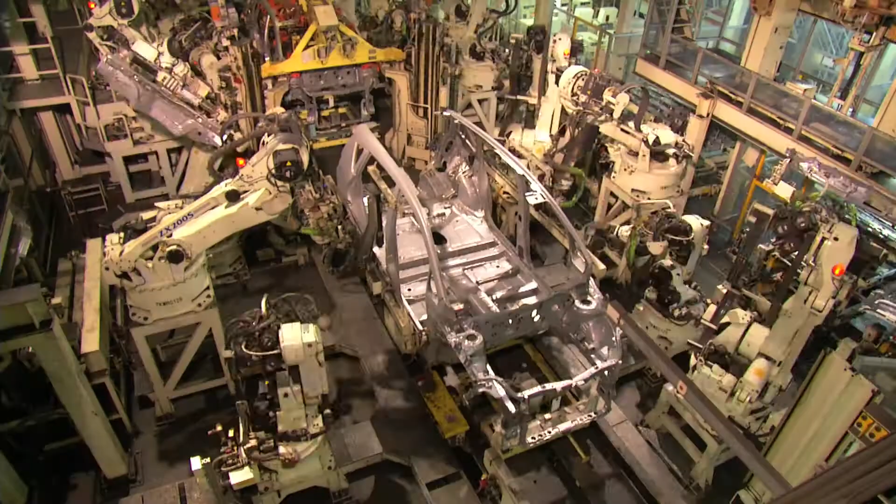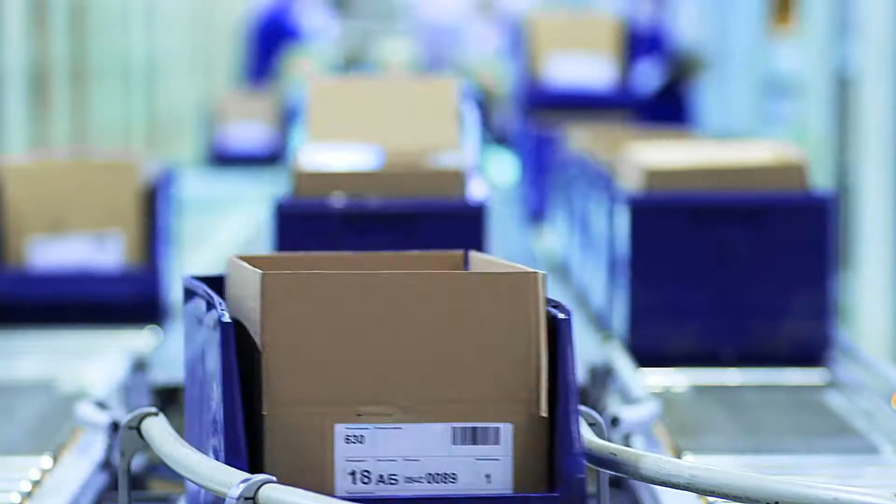The automation of mass production has been central to the growth of manufacturing industries. However, the ever-slowing rate of industrial growth is demanding a new paradigm shift.

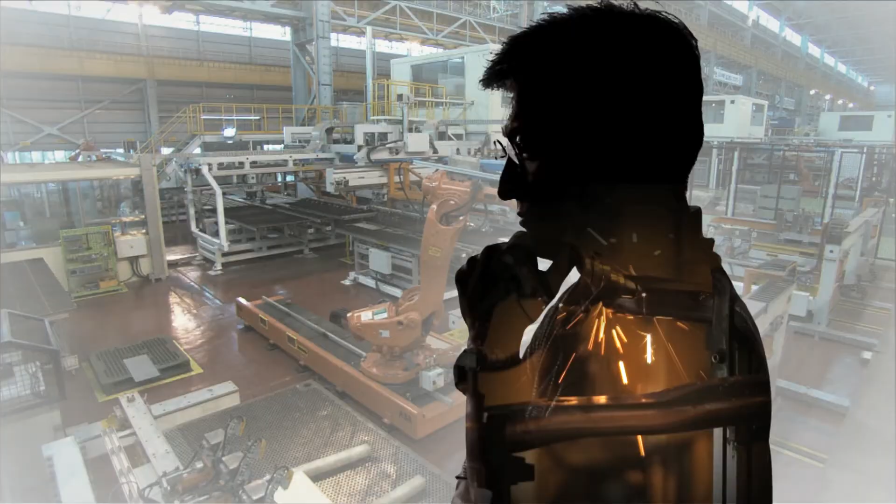Here is an industrial company boldly blazing a new trail, having successfully led the innovation of Korea's manufacturing industries. Understanding that manufacturing is at the heart of industrial convergence, POSCO is turning the vision of smart manufacturing into a reality through the convergence with cutting-edge ICT technologies. This is the story of POSCO ICT's Smart Factory journey.

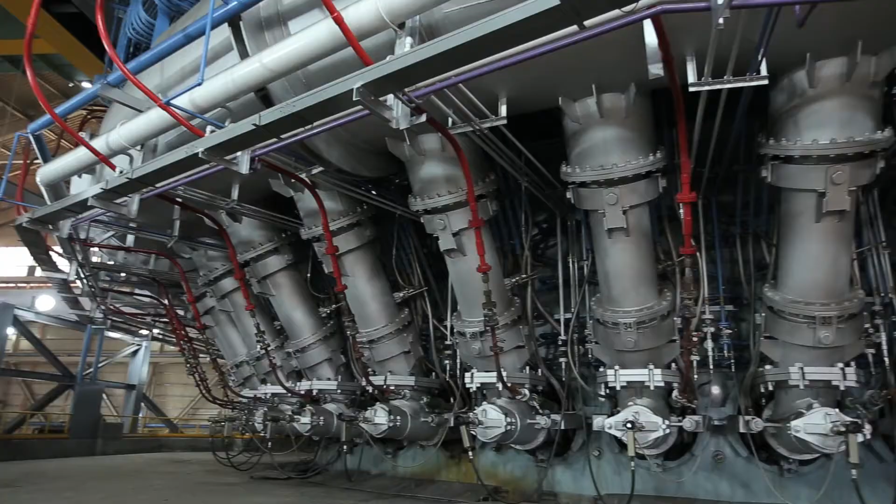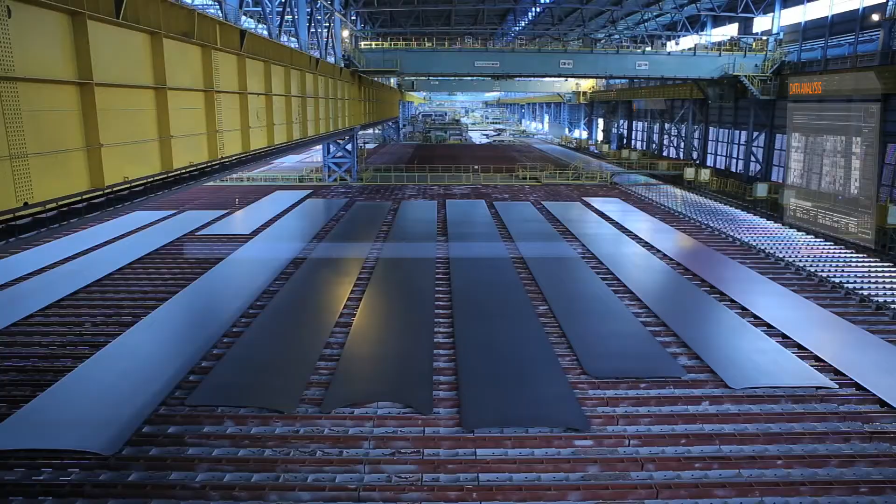With POSFrame, the world's first smart factory platform for steel and process industry, POSCO ICT adopts an IoT sensor to collect data of all fields so as to analyze and predict with big data and to control every process automatically with artificial intelligence technology.

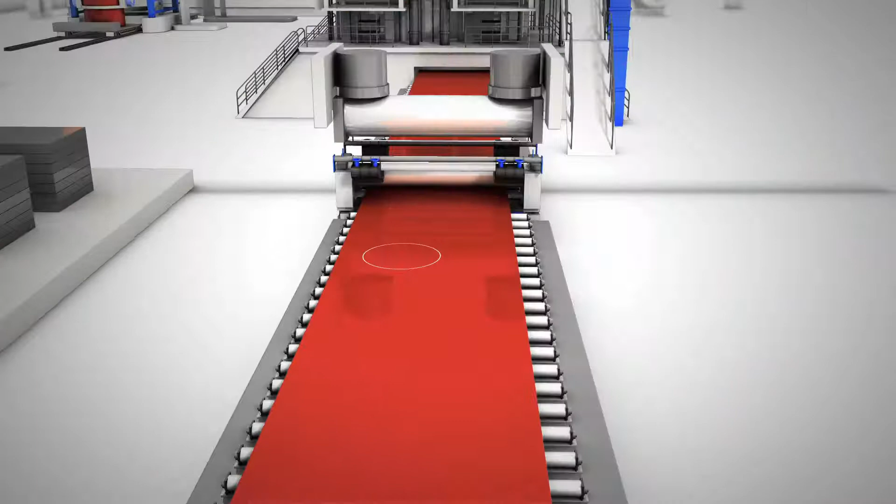Smart Factory enables POSCO ICT to achieve zero unplanned downtime operations through efficient asset management and minimize defects by intercepting quality issues online.

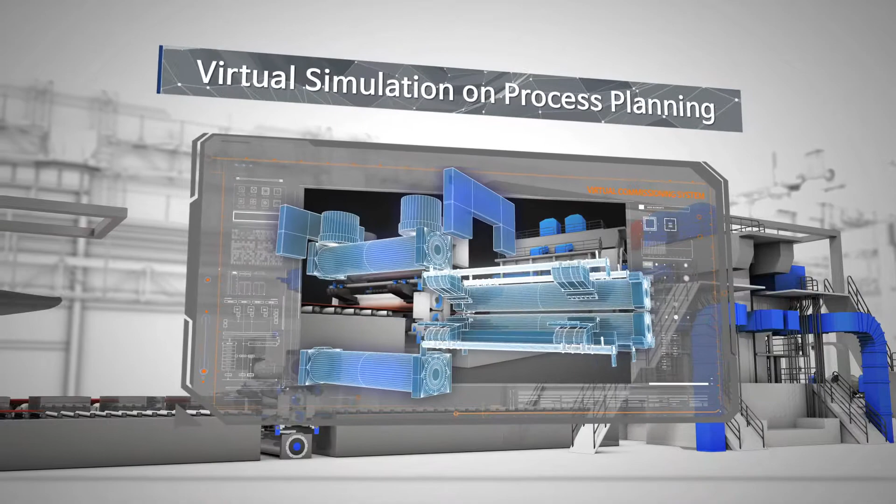With Virtual Factory, engineers can simulate production operations in advance. Smart Safety allows taking real-time countermeasures against industrial safety hazards on the factory floor.

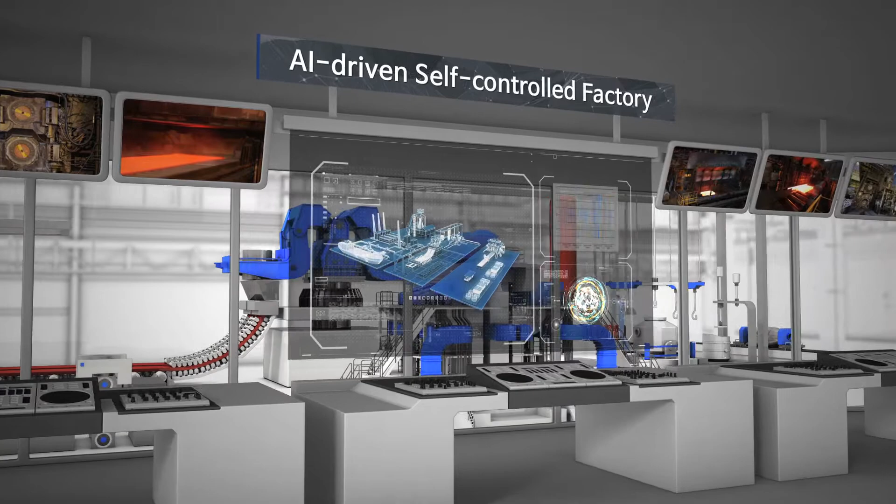Ultimately, POSCO ICT is in the process of forging a self-running steelworks that can learn, decide, and control processes through artificial intelligence technologies. Steelworks with human intelligence while overcoming human limitations. That's what POSCO ICT's Smart Factory is all about.

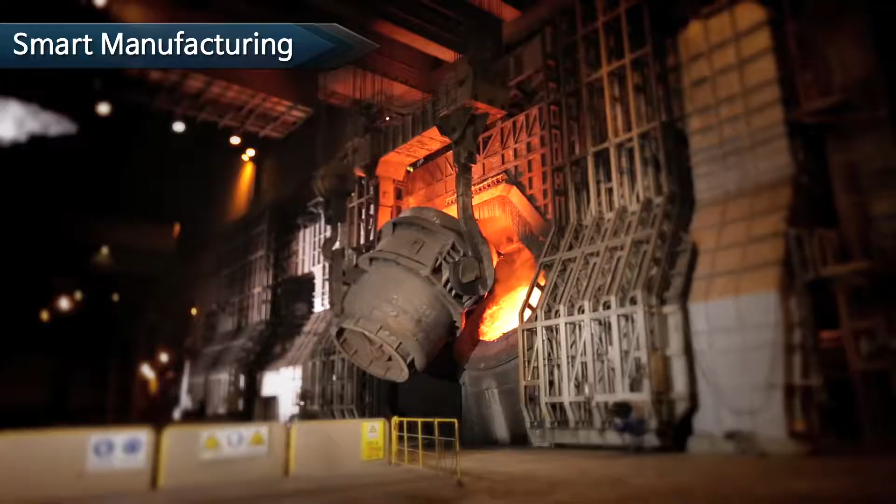Massive production assets, equipment, and facilities comprise steelworks. Productivity and quality depend on how well they are managed. Rolling machine reduces semi-finished slabs to thinner and longer strips by passing them between two rolls.

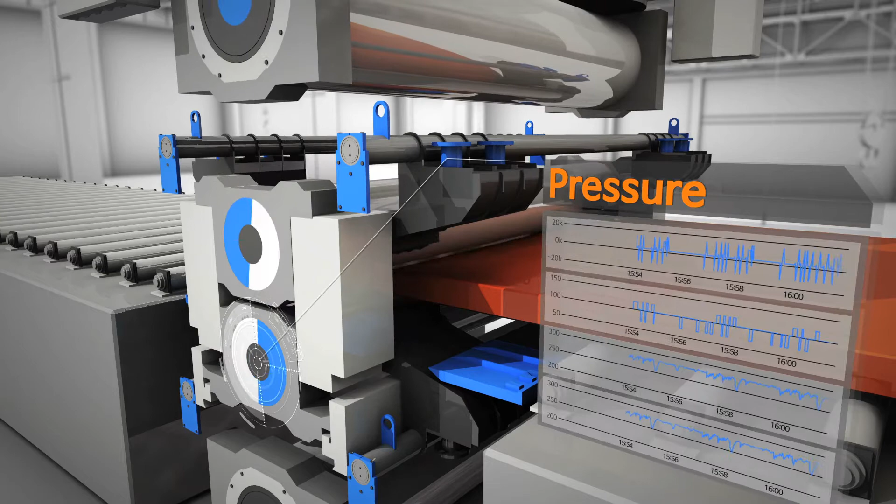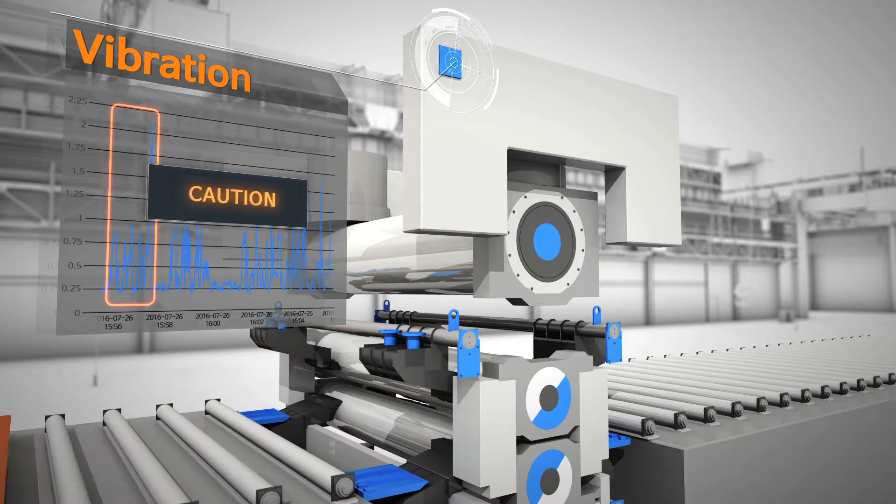IoT sensors installed on rolling machines are used to collect all parametric data generated in the process of rolling operations, including roll pressure, vibration, rolling speed, and lubrication conditions. Collected data is stored and analyzed in the big data environment. The output is used for real-time automated process control to provide an optimal operational environment.

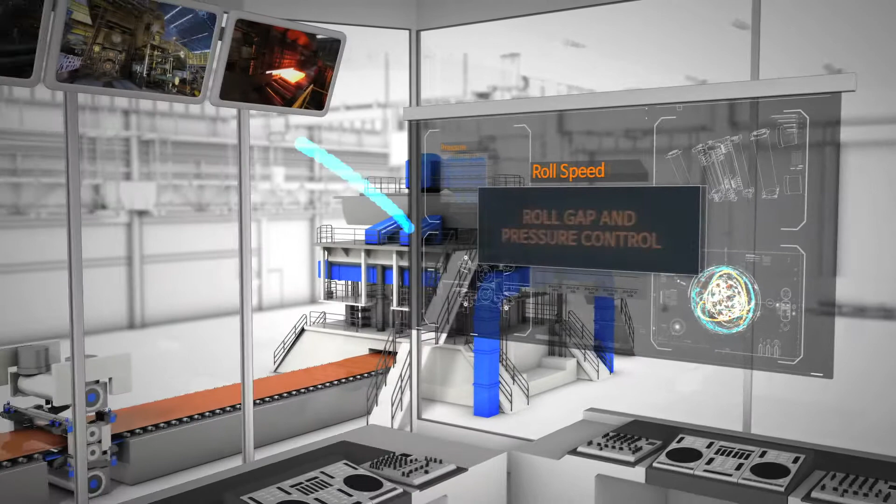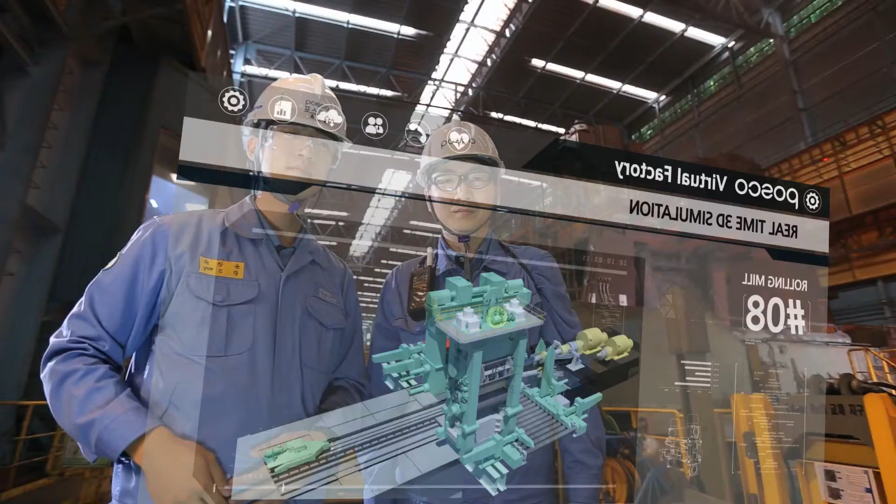When maintenance engineers inspect machines or replace parts in response to detected signs of failure, they have access to relevant guidance, digitized know-how of skilled engineers, as well as remote support from outside experts. On the shop floor, engineers can look inside, break down and reassemble machines in a simulated 3D environment to achieve higher asset management efficiency.

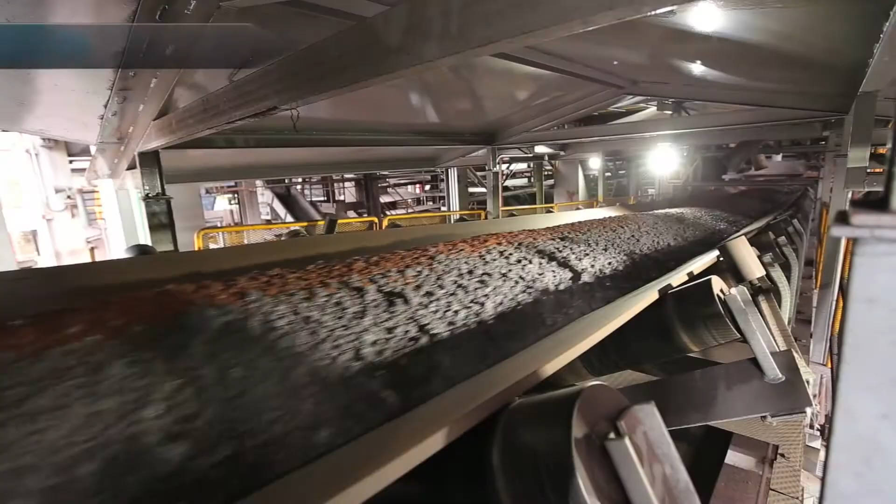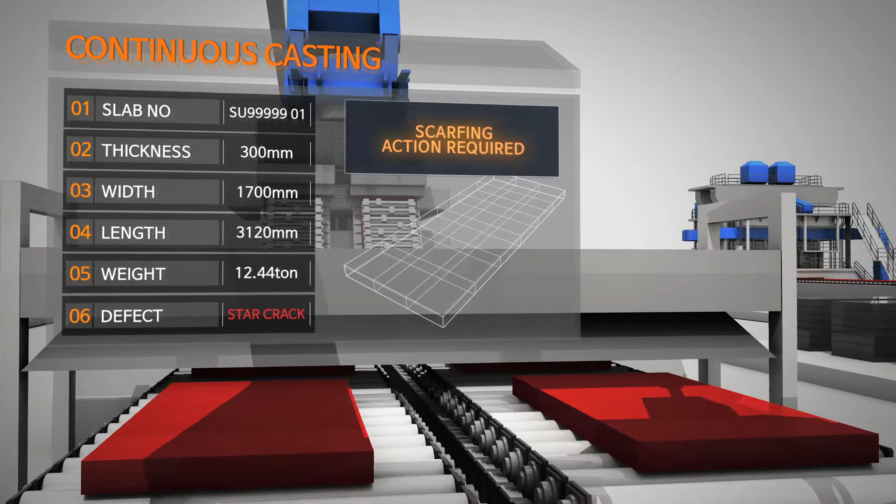The steel industry is characterized by a continuous production process, from raw materials to finished products. POSCO ICT Smart Factory identifies the causes of defects in advance through the integrated analysis of production data to automatically control defects from flowing into the downstream processes.

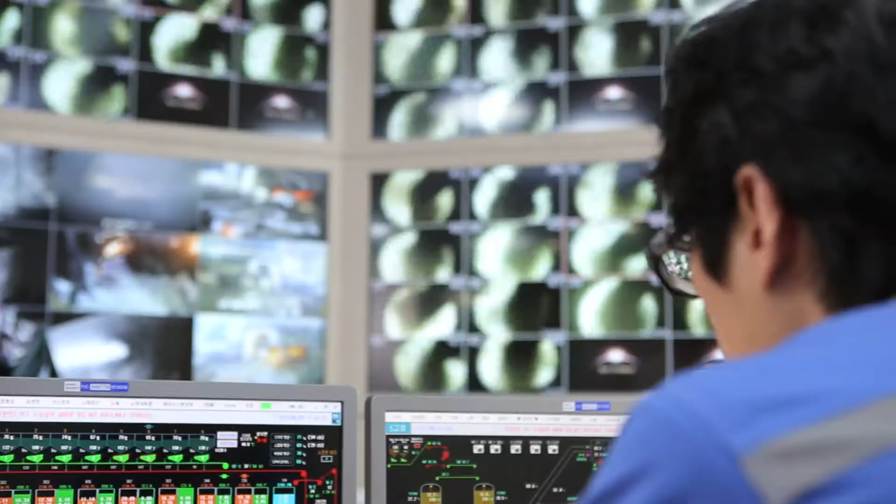This requires real-time monitoring of raw materials in blast furnaces. Quality issue data on the slabs, semi-finished products produced in the continuous casting operation, is captured and corrective steps are taken to minimize defects.

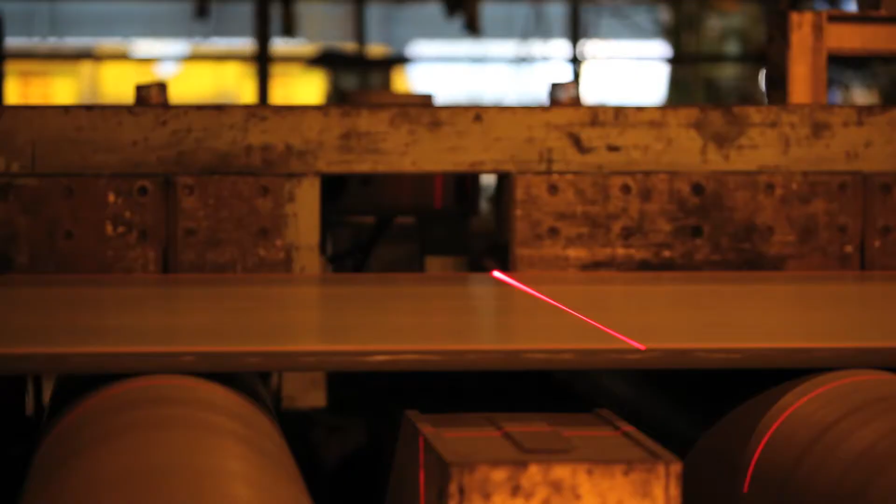Even when a surface scan on the final product discovers a defect, the exact cause of the defect can be pinpointed by leveraging the cross-operational data that maps production, quality, and asset to the final product longitudinally. At a 10-centimeter interval, action is taken to prevent recurrence of similar defects.

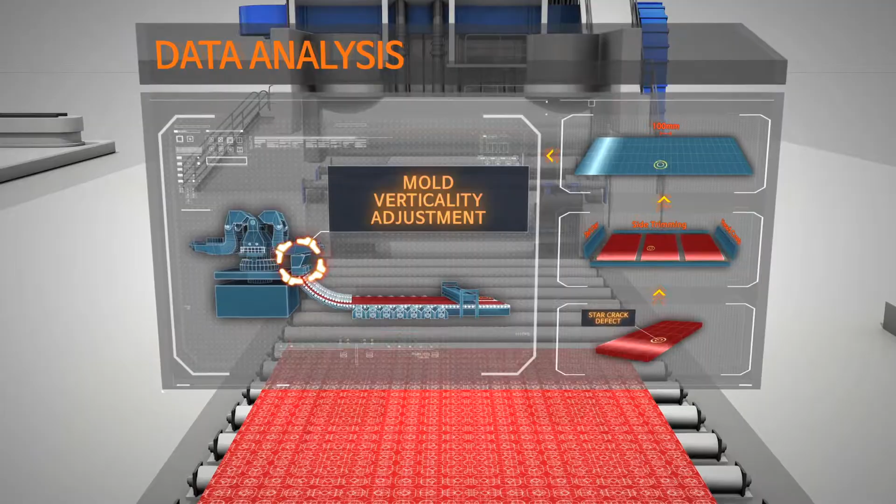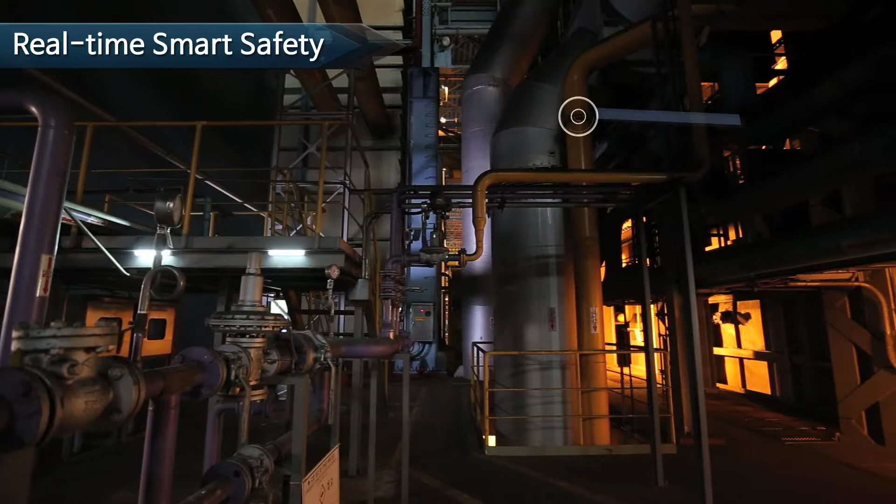POSCO ICT ensures the safety of workers in a smarter way. Sensors installed on the factory floor are used to monitor the environment of toxic gases, noise, and temperature. The monitoring results are made available to employees through alerts and notifications.

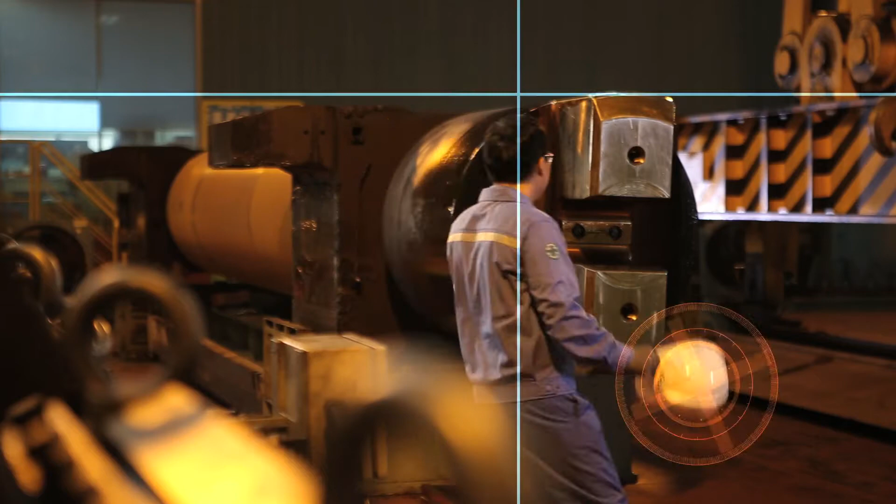Unsafe behaviors on the factory floor are monitored in real time. When employees go near the hazards, alerts are sent to stave off potential incidents in advance.

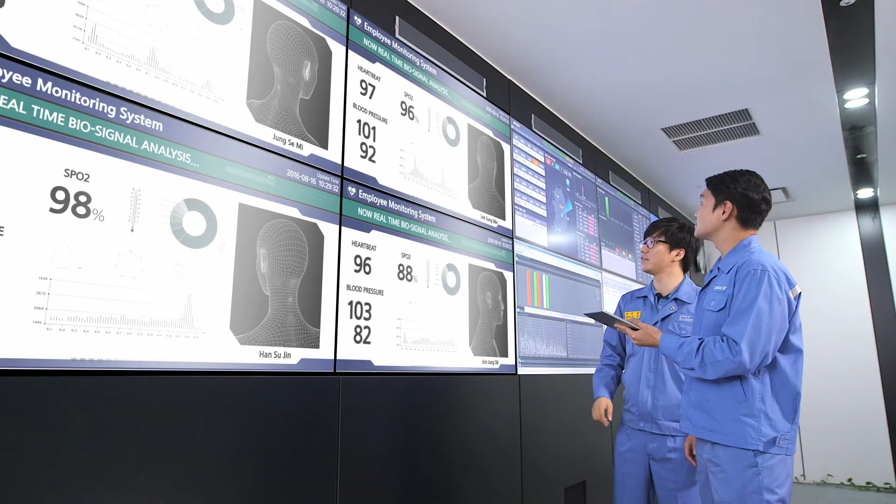The smart band tracks vital signs of the workers exposed to hazardous environments in real time and transmits the data to the central command center. Immediate action is taken when an anomaly is detected.

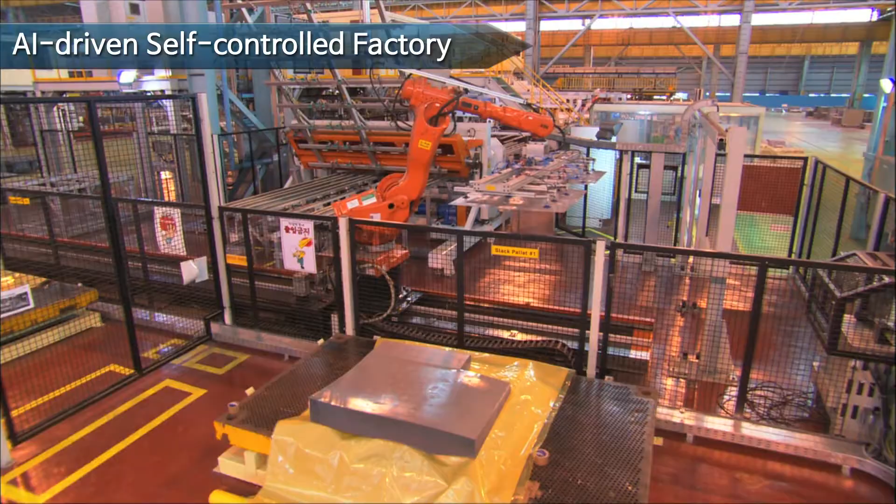Smart Steelworks evolves as production output grows. The artificial intelligence embedded in the smart factory environment learns from the collected and streaming data and determines the best course of action, enabling optimal production operations without human intervention.

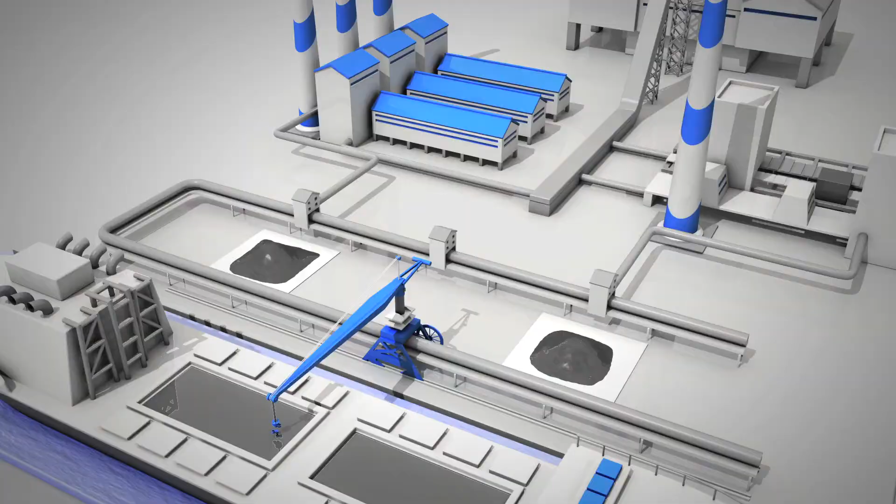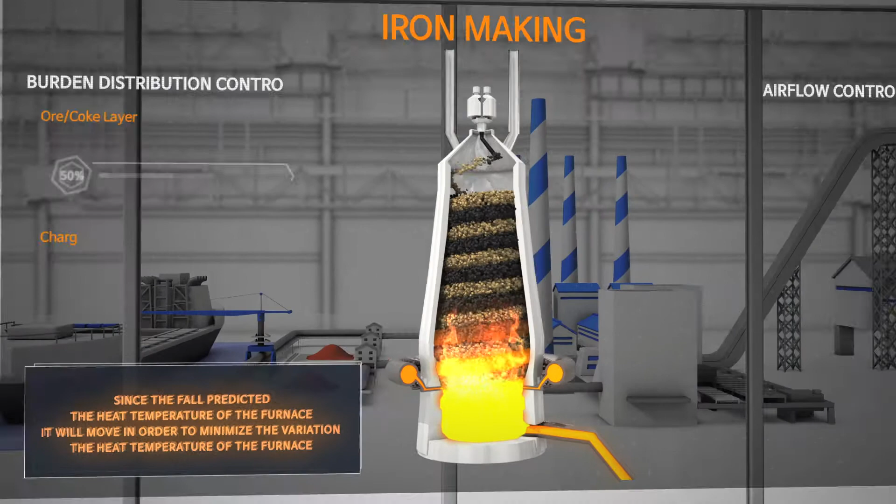The AI translates unstructured data, including images and conditions of blast furnace tap holes, raceway zones, and charge materials, to assess the exact condition of blast furnaces. The best course of action is taken accordingly.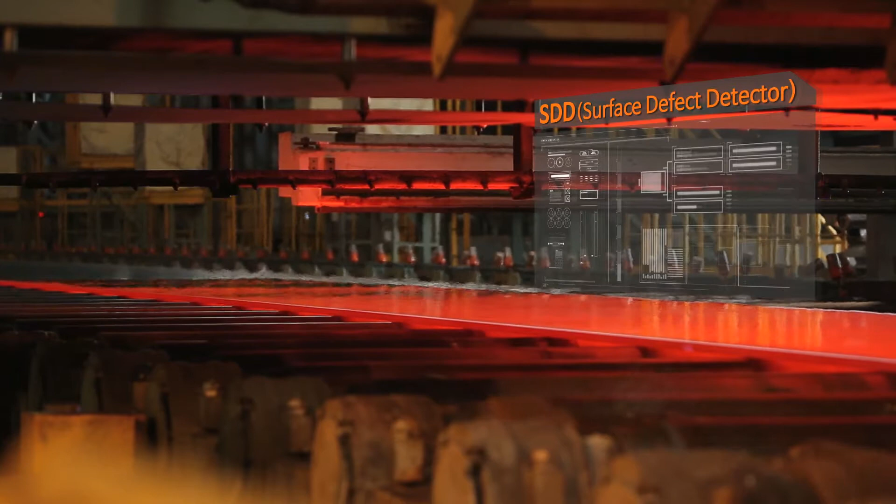The deep learning algorithms of the Surface Defect Detector, SDD, enable selection of the optimal feature, significantly enhancing the defect classification accuracy while helping guarantee higher quality and productivity.

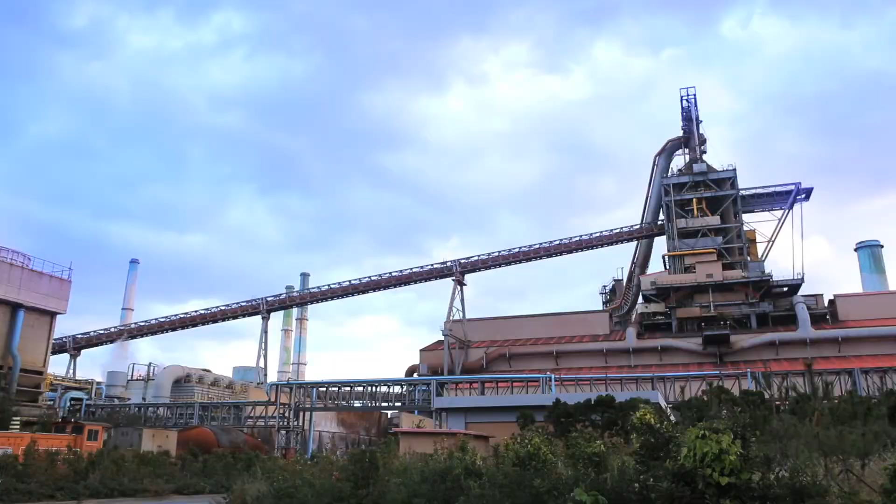POSCO ICT Smart Factory, which has applied to continuous process for the first time in the world, realizes Smart Steelworks, where entire production operations from raw materials to the final products are automatically controlled and continuously evolved with time.

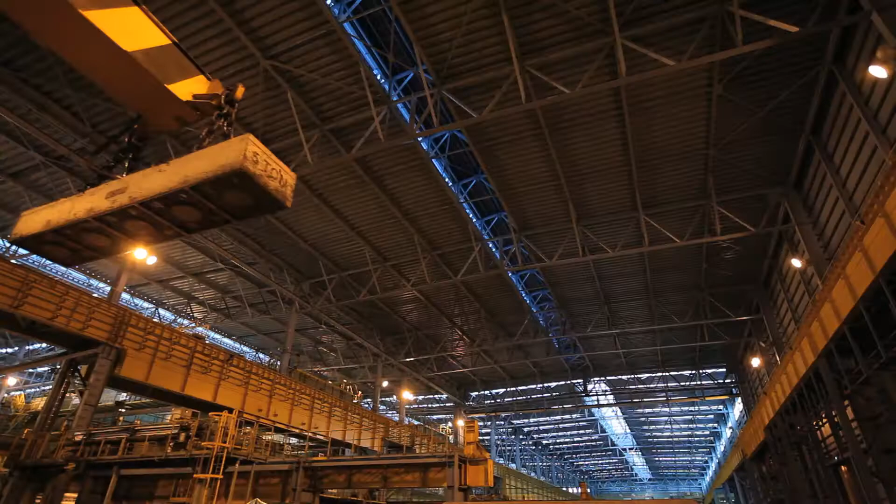Creating a new renaissance in manufacturing, leading the way with Industry 4.0, with world-class competitiveness in quality and production, while expanding its application to continuous processes in other industries. POSCO ICT Smart Factory.